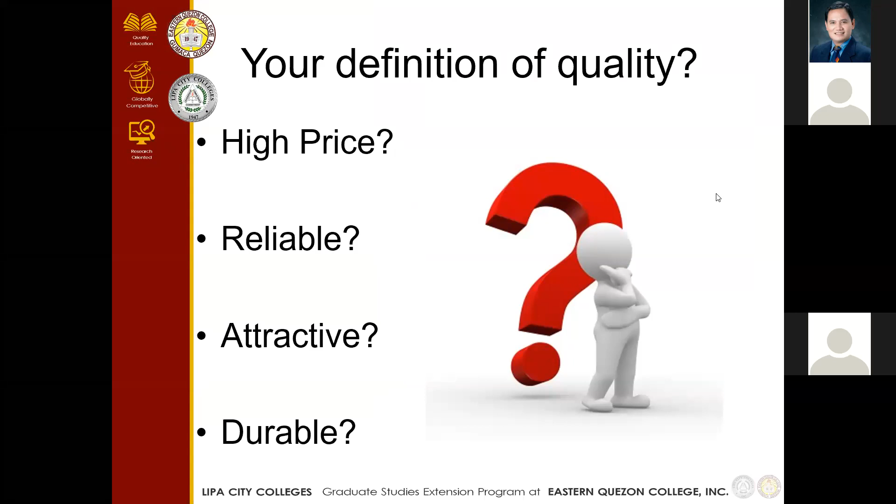So what is your definition of quality? Is it about the price, how reliable it is, how attractive it is, or is the product durable? Quality begins with the design of a product in accordance with customer specification. Further, it involves established measurement standards, the use of proper material, and selection of suitable manufacturing process. Quality is a relative term and is generally used with reference to the end use of the product.

According to Philip Crosby, quality is conformance to requirements or specifications. And Joseph Juran defined quality as fitness for use. It is the quality of a product or service in the fitness of that product for meeting or exceeding its intended use as required by the customer.

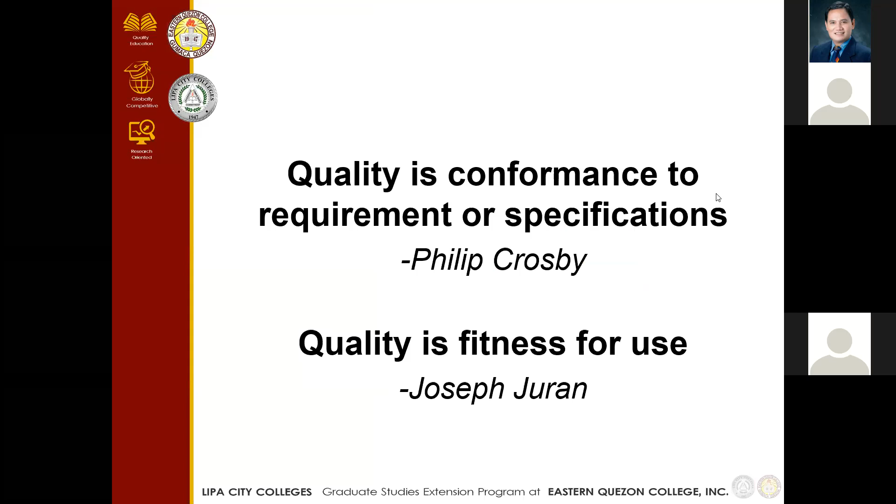So there are 9 fundamental factors affecting quality. We also call them the 9 M's, and these are: market, money, management, men, motivation, materials, machines and mechanization, modern information methods, and mounting product requirements. So let's discuss them one by one.

For market, or our target consumers, because of technology improvement, we could see many new products to satisfy customer desires. At the same time, customer wants are also changing vigorously. It is part of the companies to identify the customer's desires and then meet it with existing technologies or by developing new technologies. As we discussed before, in high school or college, we learned that consumers are the ones who dictate what a company should produce according to what they want. So, number 2 is money.

Increased global competition requires huge outlays for new equipment and procedures. When we were local, we only wanted the local market. But when we want to go global, outside our own country, we need huge capital for equipment and procedures. These should be rewarded by improved productivity. This is possible by minimizing quality costs connected with the maintenance and enhancement of quality level.

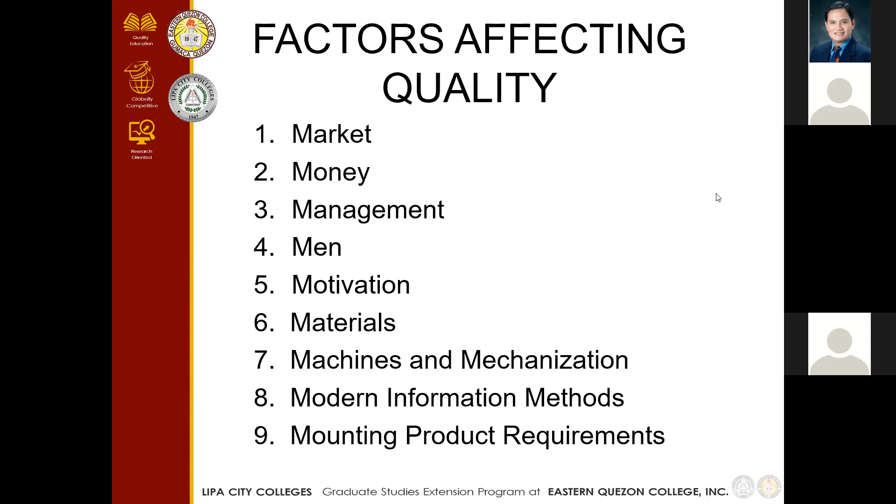So we are done with the definition of quality. Let us proceed to control.

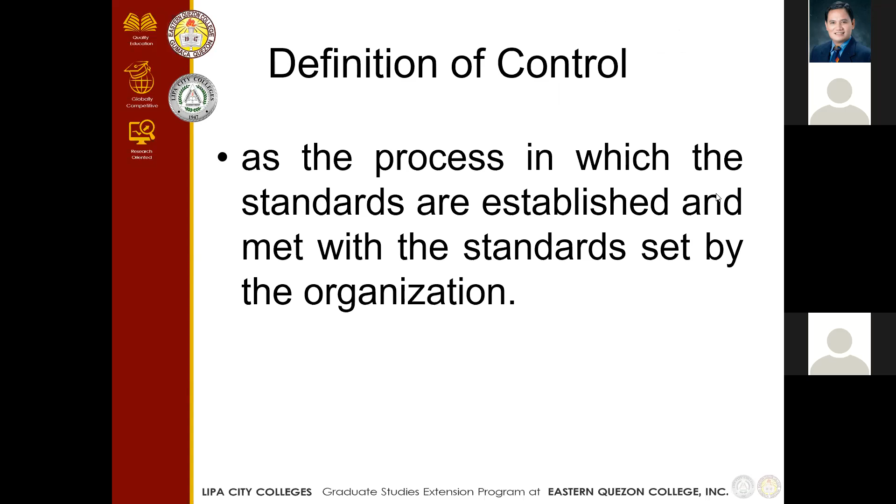Control is defined as the process in which the standards are established and met with a standard set by the organization. This method consists of observing the activity performance, associating the performance with some standard, and then taking action if the observed performance is meaningfully different from these standards.

So the control process involves a universal sequence. Number one, we need to choose the control object. Number two, choose a unit of measure. Three, set the standard value. Then choose a sensing device which can measure it. Then measure actual performance.

Number six, interpret the difference between actual and standard. And number seven, we need to take action regarding this.

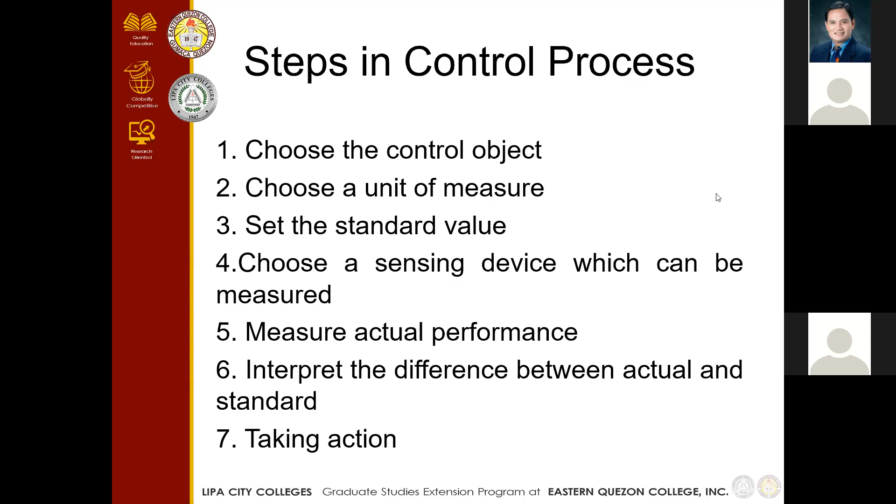Why, in the absence of quality control, it will result in the following. That's why we need controlling of quality. Number one, there will be no yardstick for comparing the quality of goods and services.

Number two, it will be difficult in maintaining consistency in quality. Three, dissatisfied customers due to increased maintenance and operating costs of products and services. Number four, increased rework cost while manufacturing products and providing services. Number five, it reduces the lifetime of the products or services. It may also reduce flexibility with respect to usage of standard spare parts.

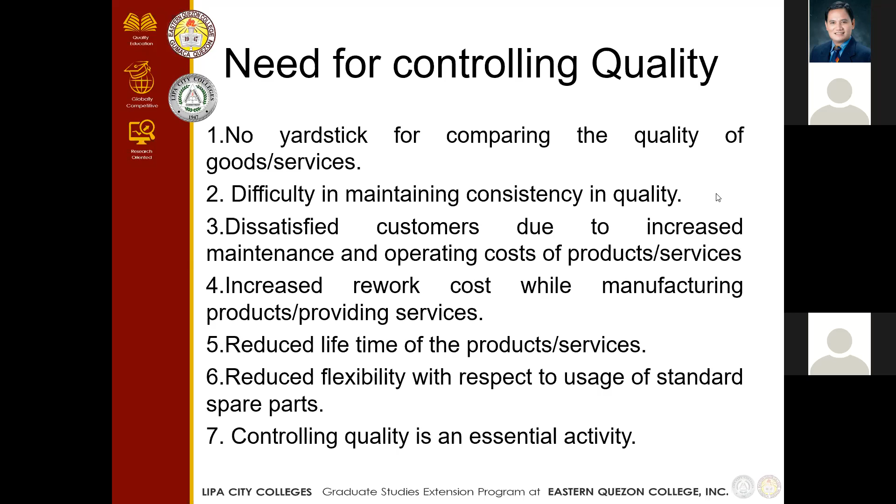Number seven, controlling quality is an essential activity. So, what is quality control?

According to Joseph Juran, quality control is the regulatory process through which we measure actual quality performance, compare it with the standards, and act on the difference. According to American National Standards Institute or ANSI, or American Society for Quality Control or ASQC, it is the operational techniques and activities which sustain a quality of product or service that will satisfy given needs. Also, the use of such techniques and activities.

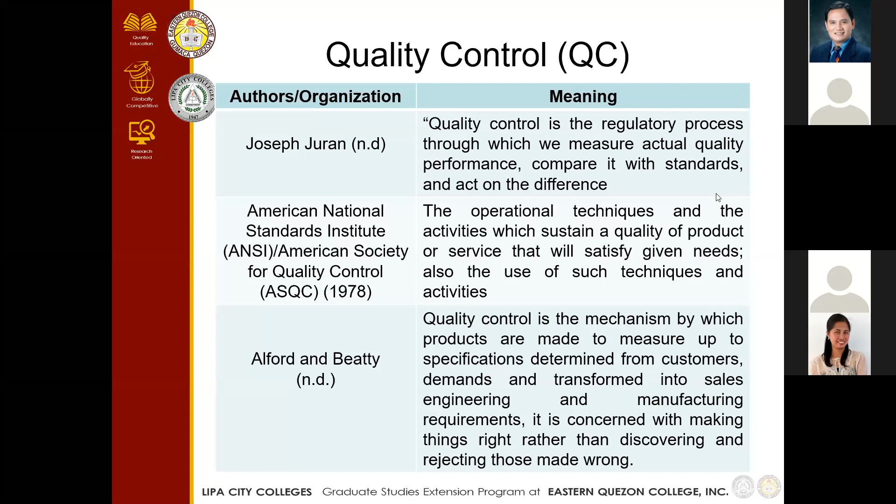According to Alford and Beatty, quality control is the mechanism through which products are made to measure up to specifications determined from customer demands and transformed into sales, engineering, and manufacturing requirements. It is concerned with making things right rather than discovering and rejecting those made wrong.

So there are types of quality control: number one is offline quality control, number two is statistical process control, and number three is acceptance sampling plans.

What do we mean by offline quality control? Its procedure deals with measures to select and choose controllable product and process parameters in such a way that the deviation between the product or process output and the standard will be minimized. Much of this task is accomplished through product and process design.

So offline quality control happens during product development pa lang, meron na tayong QC sa product development. Meron din tinatawag natin, kagaya ng Toyota, ginagawa nila yung Taguchi method. It is related to prevention of failures or future failures. Kumbaga, since meron process, nagde-develop sila ng product design at saka process, gumagawa sila ng mitigation plan. Just in case na halimbawa hindi maging maganda, meron agad silang step 2, step 3, step 4, plan A, plan B, plan C.

Number 2 is statistical process control or SPC. It involves comparing the output of a process or a service with a standard and taking remedial actions in case of discrepancy between the two. It also involves determining whether the process can produce a product that meets desired specifications or requirements.

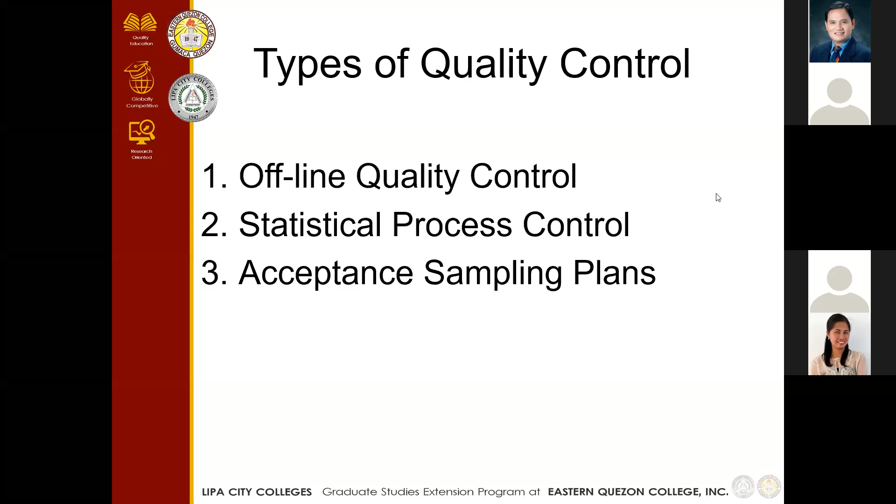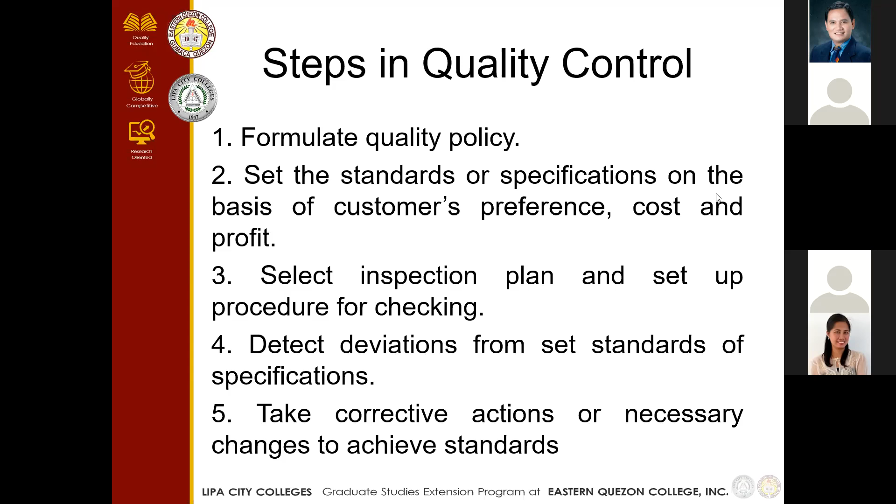Number 3, select inspection plan and set up procedure for checking. Number 4, detect deviations from set standards or specifications. Number 5, take corrective actions or necessary changes to achieve standards. Number 6, decide on salvage method. An example is to decide how defective parts are disposed, either entire scrap or rework.

So doon sa QC, parang siguro napansin ko lang, kagaya halimbawa sa amin sa service na ibinibigay namin, doon sa paano namin nasasabing yung kalidad ba yung ibinibigay naming serbisyo. Meron po kaming tinatawag sa National Electrification Administration na Key Performance Indicators o KPI, na kung saan tinitingnan doon kung pumapasa ba ang QUEZELCO I in terms ng financial, institutional, and technical. So yearly po, meron kaming evaluation kung meron bang na-meet ang QUEZELCO I yung target nila, yung KPI, kung namimit ba nila.

Sa school, meron din pong ganun, meron mga parameters na ini-establish ang DepEd or CHED para i-rank yung school. Ito ba ay pwede na sa mga may level ng accreditation yung school. So ganun din meron silang mga in terms sa service, pero ito kasi quality is in terms sa manufacturing.

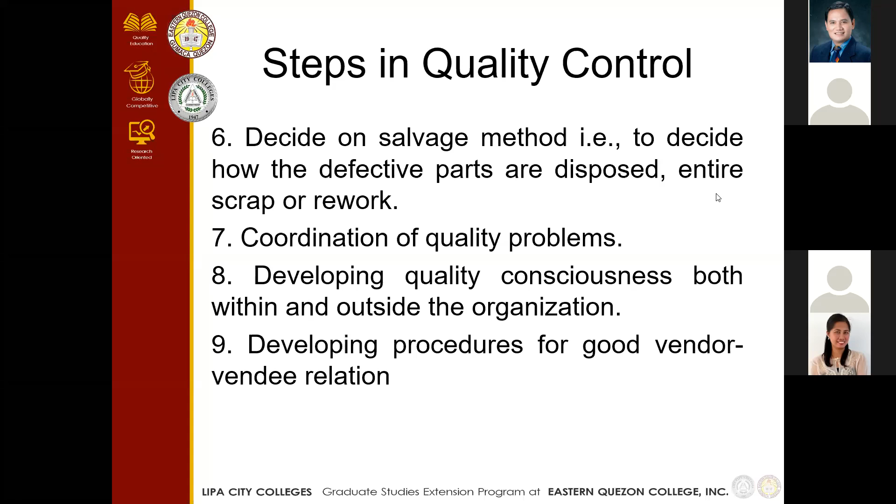Pero dito naman sa mga manufacturers, yung pinakamadaling masabi natin na ayos yung quality control nila or yung QC, sila ay member or accredited ng ISO, ng International Organization for Standardization. Yan naman ay mapapaliwanag ng susunod na reporter, yung ISO. So sa quality control, yan in terms of manufacturing.

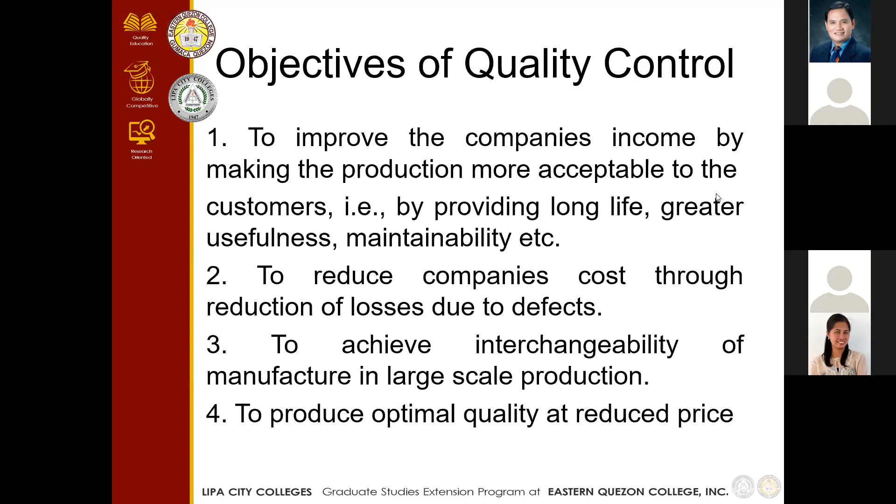Ano po ba yung objectives ng quality control? Number 1, to improve the company's income by making the product more acceptable to customers. Number 2, to reduce company's cost through reduction of losses due to defects. Number 3, to achieve interchangeability of manufacture in large-scale production. Number 4, to produce optimal quality at reduced price.

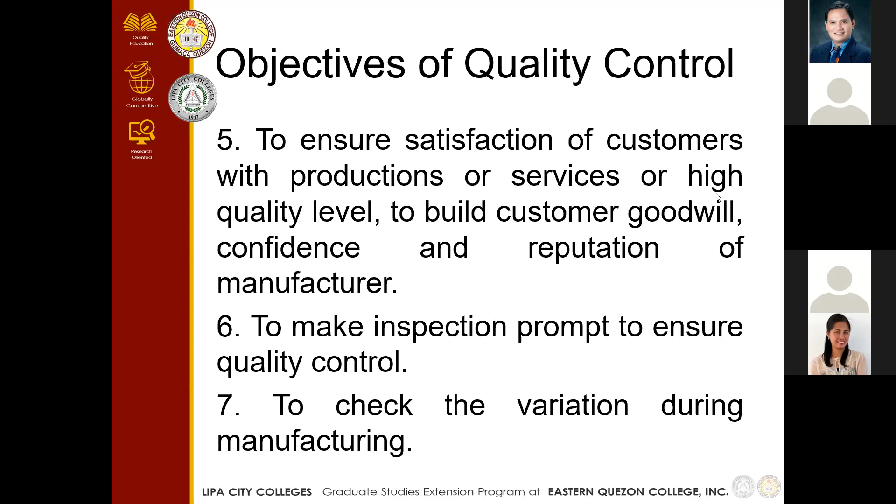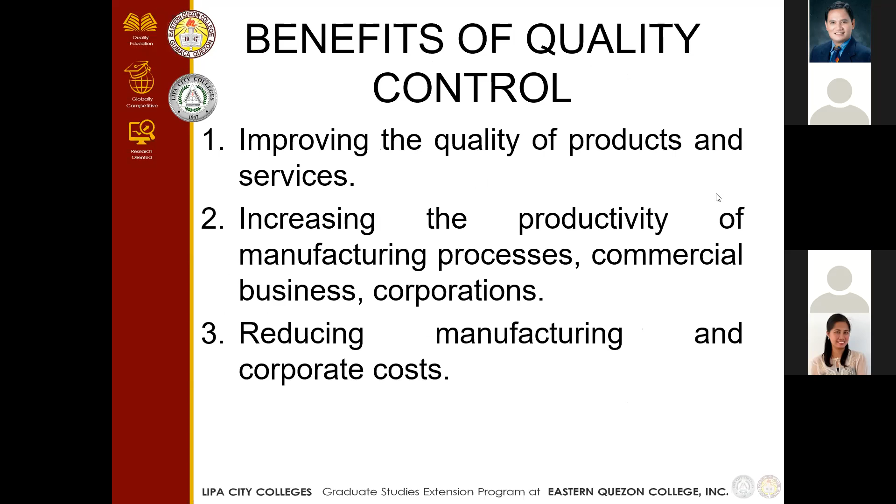Ano ba yung significance ng quality control, o ano ba yung benefits or advantages nito? It improves the quality of products and services, then it increases the productivity of manufacturing processes, commercial, business and corporation, and reduces manufacturing and corporate costs.

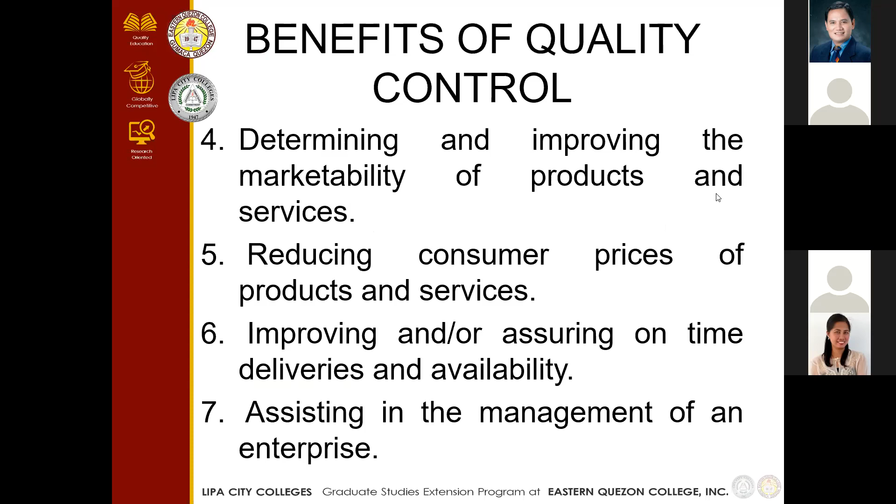It determined and improved the marketability of products and services. It reduced consumers' price of products and services. It improves and assured on-time deliveries and availability, assisting in the management of an enterprise or business.

There are tools for quality control. Meron tayong 7 tools ng quality control. Number 1 is checklist, ito po yung sample natin. Ito yung pinaka-basic, it is the most basic. Quality control requires to check off a list of items that are imperative to manufacture and sell our product.

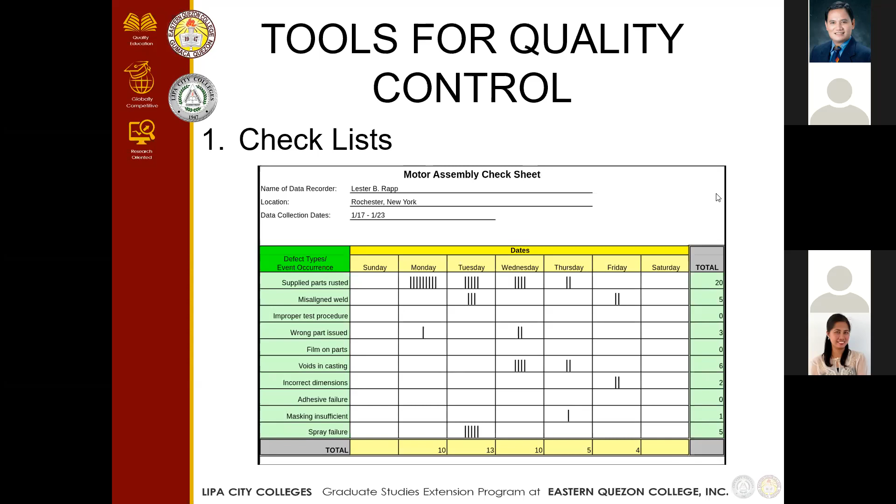That is the checklist. And then sample po natin, fishbone diagram. Makikita natin, this visual is helpful for determining what causes a specific problem from equipment, process, then the people, or the manpower, methods or management.

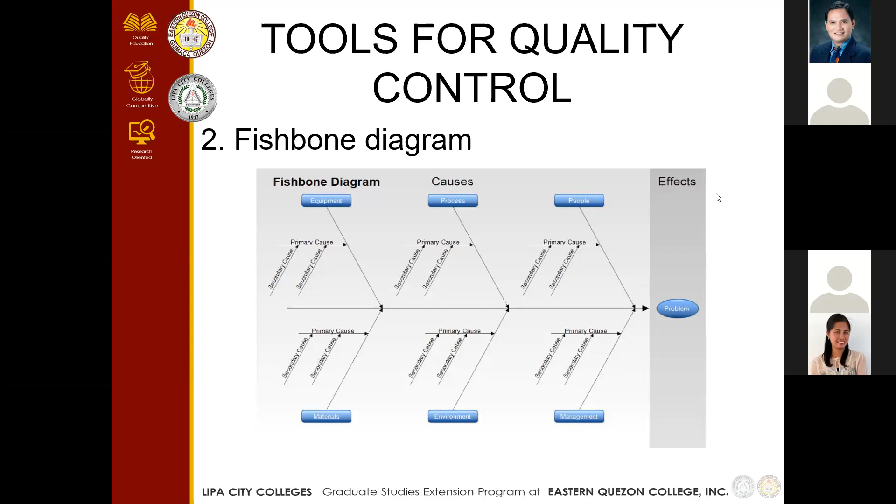Number 3 is the control chart. This helps to see how processes historically change using controls. That chart helps to find and correct problems as they happen, predict a range of outcomes, and analyze variations.

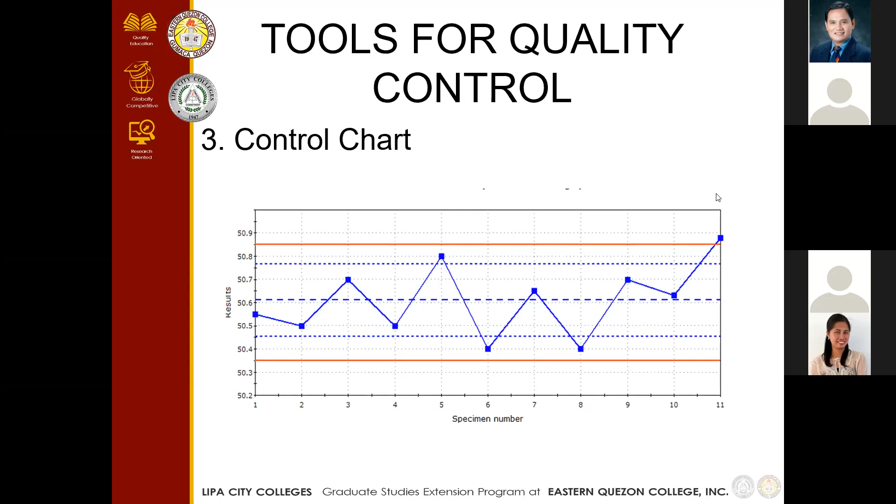Number 4 is the stratification. Instead of looking at all factors together, stratification separates data so we can identify patterns and specific problems. We have the stratification variables, tables, then the graph chart, and the advanced chart.

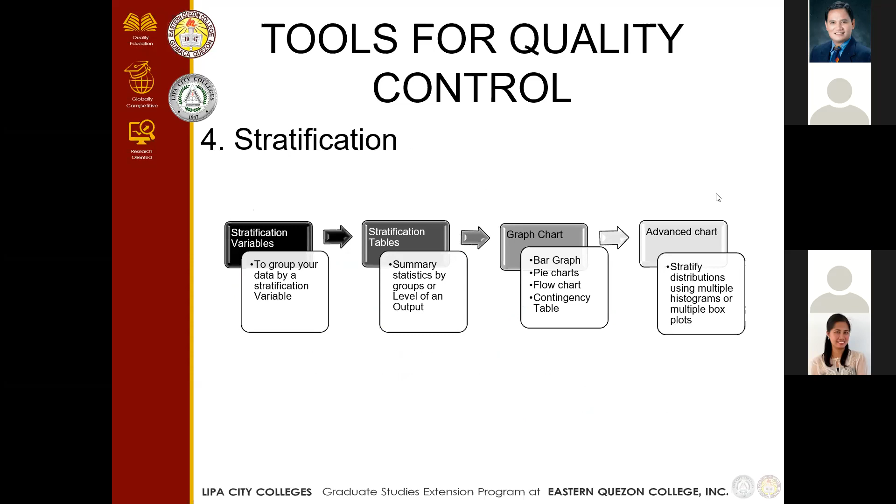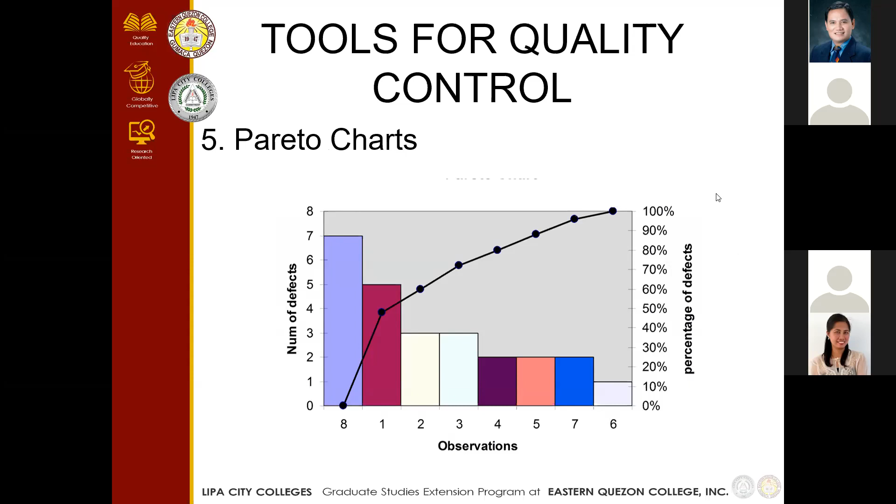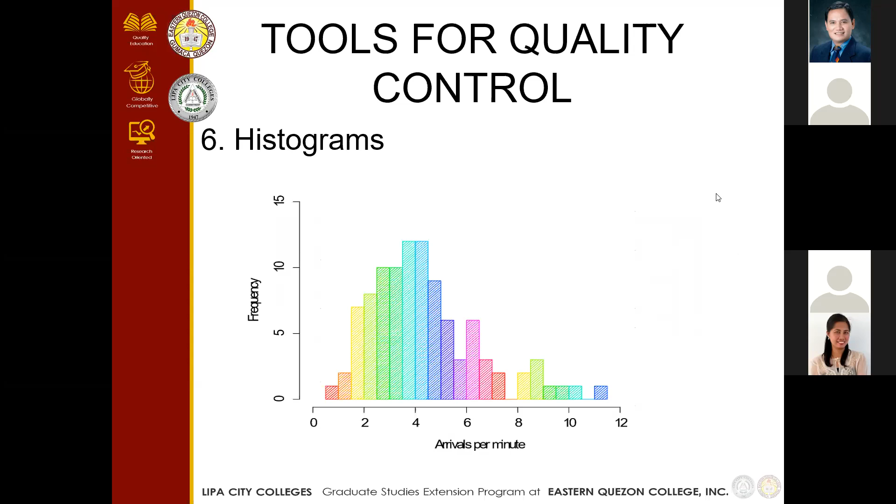The Pareto chart, this type of bar chart provides a visual analysis of problems and causes so we can focus on the most significant issues. Number 6 is histograms, it is a common graph that uses bars to identify frequency distribution that indicate how often defects occur. Then number 7 is the scatter diagram.

It is plotting information along 2 axes on this graph, which can help visually identify the relationship between variables. So yan po yung 7 natin, 7 quality control. Hindi naman lahat yan kinakailangan, pwedeng depende sa management kung ano yung pipiliin nilang tool para dun sa quality control.

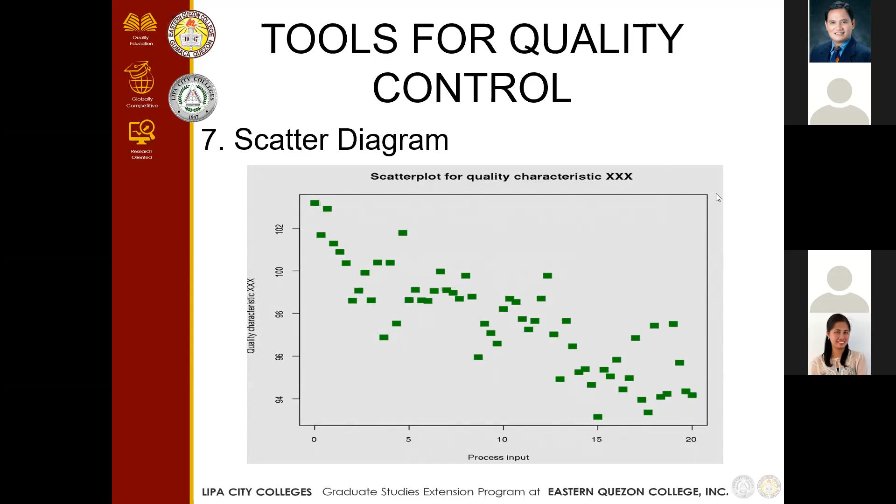Then to end my presentation, according to John Ruskin, quality is never an accident. It is a result of intelligent effort. So hanggang dun lang po at maraming salamat. So ito po yung reference ko.

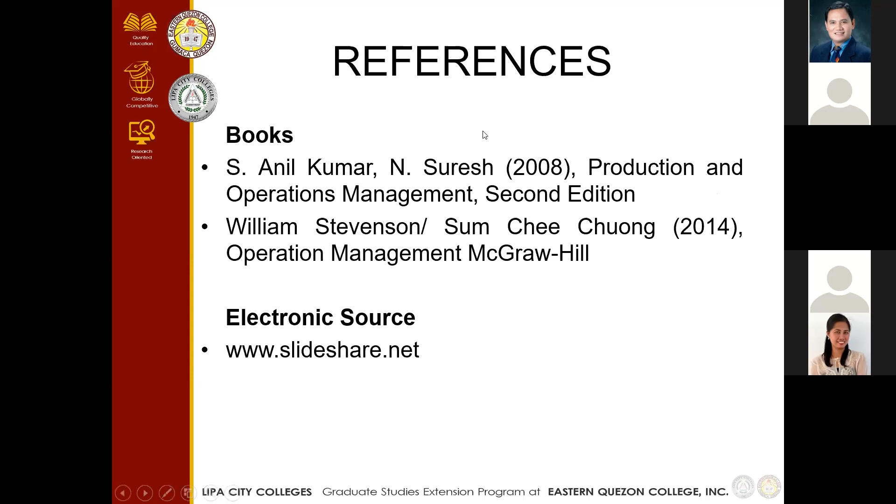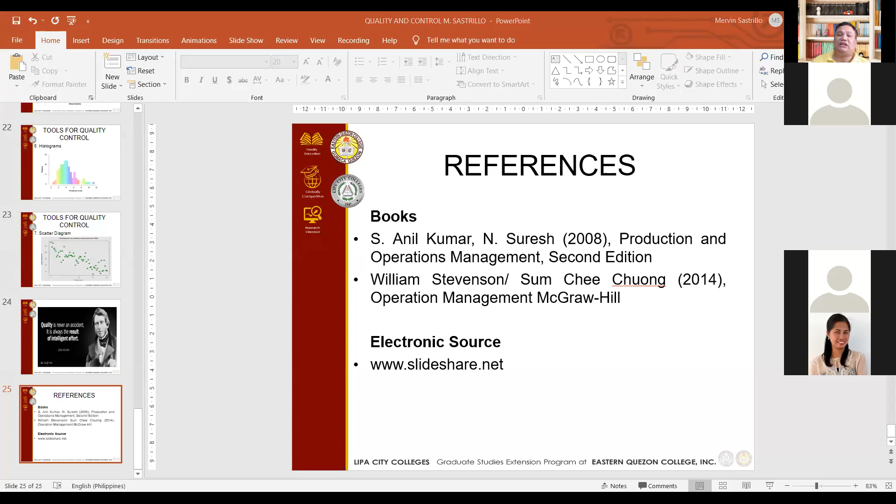Again, it is reiterate once again with our presenter that the objective of quality control, of course, is to establish the desired quality standard which are acceptable to the customers. Of course, to discover flaws or variation in the raw materials and the manufacturing processes in order to ensure smooth and uninterrupted production, to evaluate the methods and process of production and suggest further improvements in their functioning.

To study and determine the extent of quality deviation in the product during the manufacturing process, analyze in detail the causes responsible for such deviation, and of course, to undertake such steps which are helpful in achieving the desired quality of the product. Okay, so thank you very much, sir, for your comprehensive discussions about quality and control.